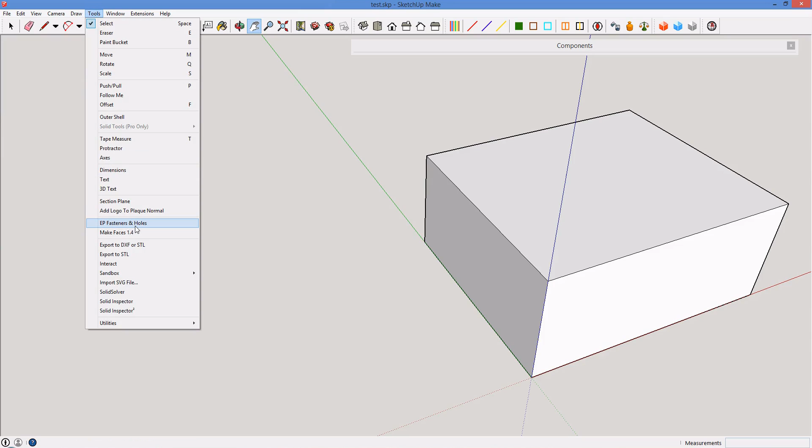Hello, I'm Jay Watson with EyePhysics, and I'm showing our EP Fasteners and Holes tool, which, if you've installed it right, should be on your Tools menu. We needed a tool that would let us drill threaded holes through solid material that we were going to be printing. We have a Formlabs Form 1 printer.

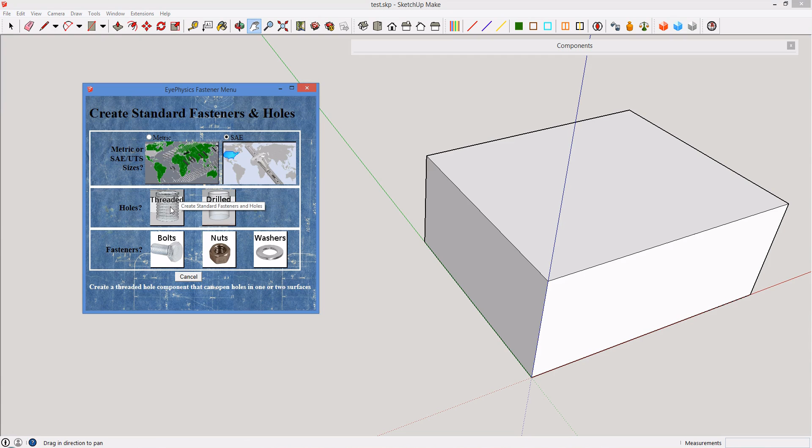So on the tool you can select metric or American standards. You can do drilled holes, threaded holes, bolts, nuts, and washers. We'll start with the threaded because those are the most interesting. Standard sizes, so 3/8 inch, 7/16, 1/2 inch. Coarse, fine and extra fine. If an extra fine is really not available for that size, we use the fine dimension.

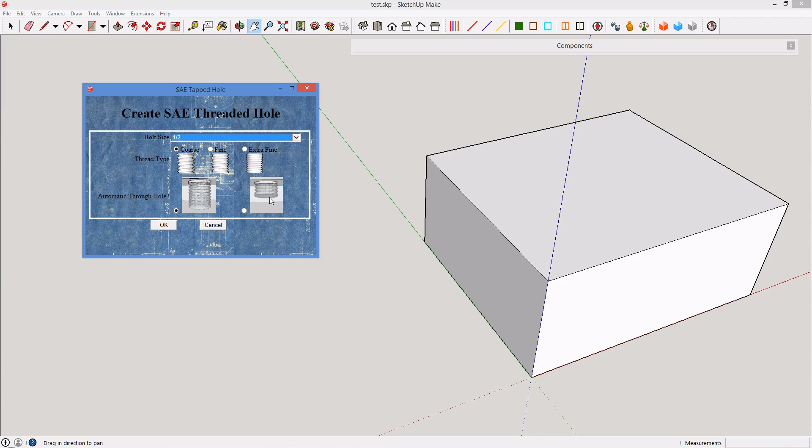And you can have it be a hole of a set distance with a bottom, or a through hole, which will automatically cut and glue itself to both sides. So we'll start with a fixed length, 1 inch. Place it on a surface and it just plugs itself in. See, there's a bottom to it. Threads look well formed.

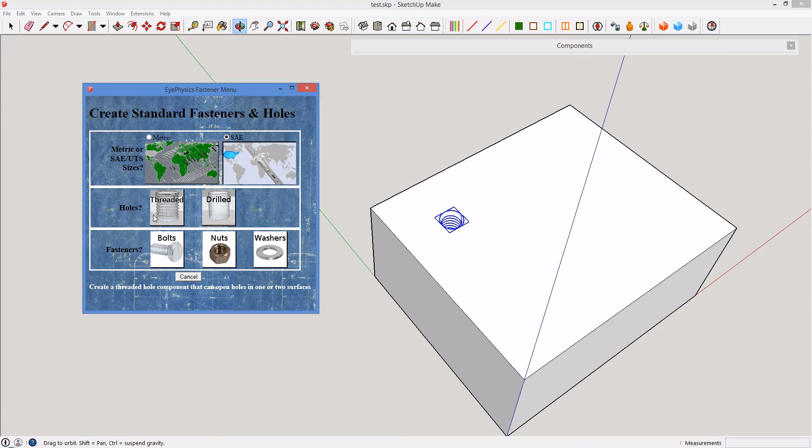If we select a through hole, the length goes away because it's automatically calculated. And now we're creating a 1/2 inch hole, but it doesn't know how long to make it yet, so it's just a hole. So we'll start with putting it on top, and it says that it's going to calculate it to be 2.39 inches.

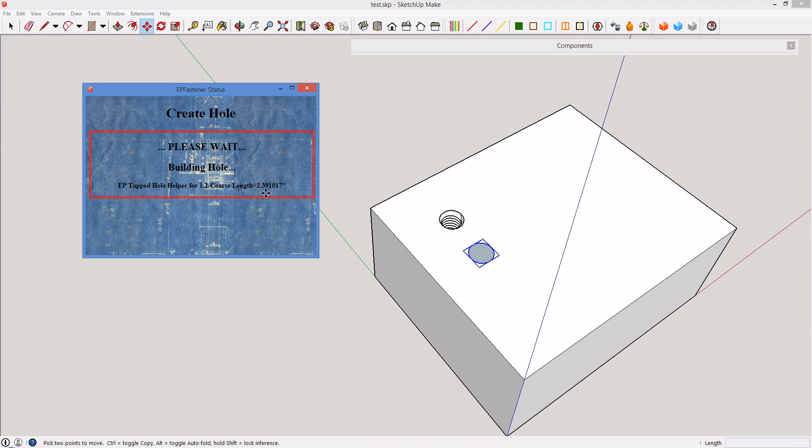And if we look at our components for this model, we find we have a tapped hole of 1/2 inch coarse with a length of 1, that is not a through hole, a tapped hole 1/2 coarse that is 2.39 inches long, that was a through hole, and a helper for the 1/2 inch coarse. And the helper is what's creating the second hole. And you can also just pick that up and make another hole. And since we already have an object that's 2.39 inches long, it just uses it.

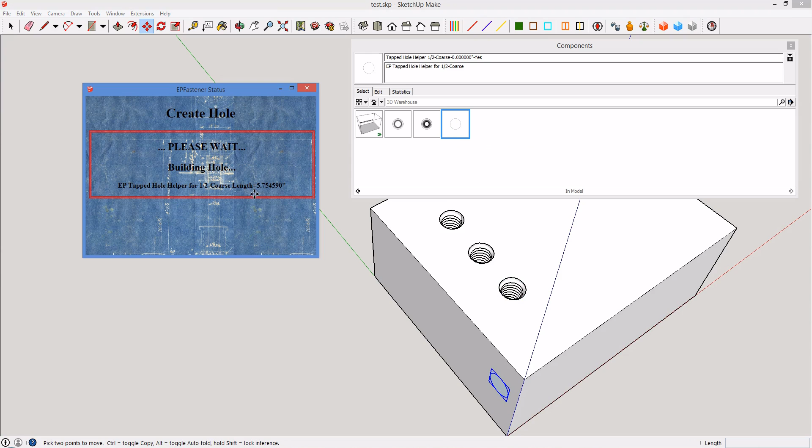If we pick it up and we place it on a different face, now it has to calculate a new distance, and it came up with 5.75 inches through our model. And it's generating the geometry for that. And it'll add a new component of the appropriate length when it finishes.

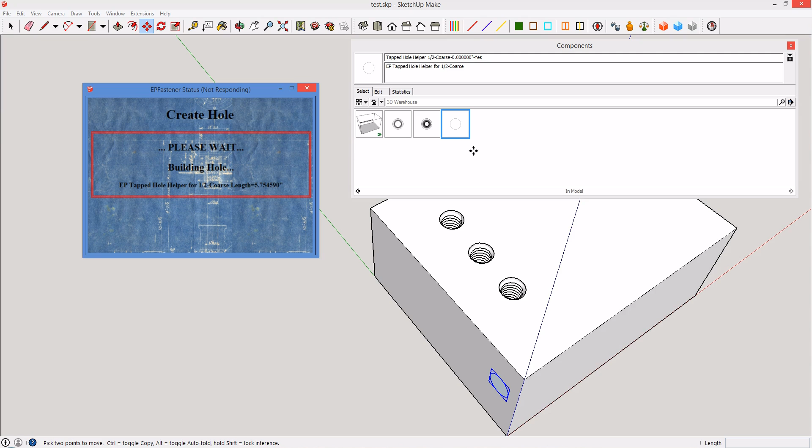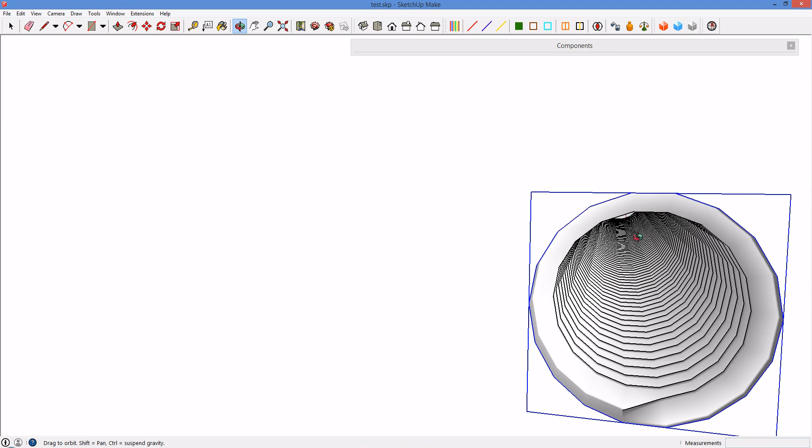So now we have a threaded hole with a length of 5.75. That is also a through hole. So we can look through it and see that it goes all the way through to the other side. Has threads the full length. And once again, if we pick up the helper for this size and drill it through, it's able to reuse the component. So it's much faster, and of course we may have intersected one of those other holes if we weren't careful.

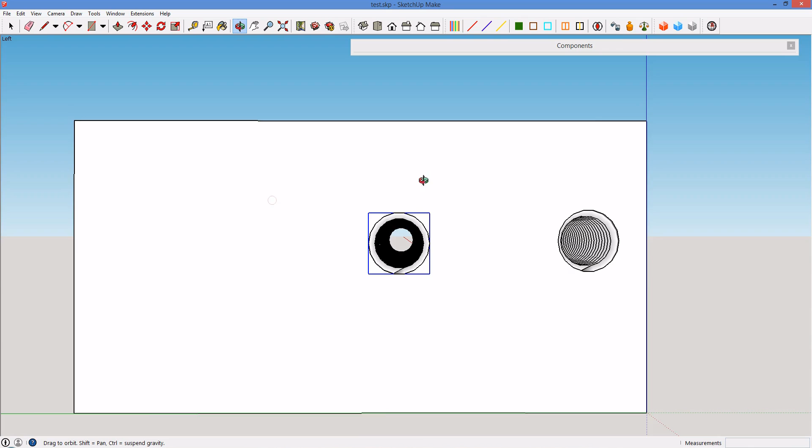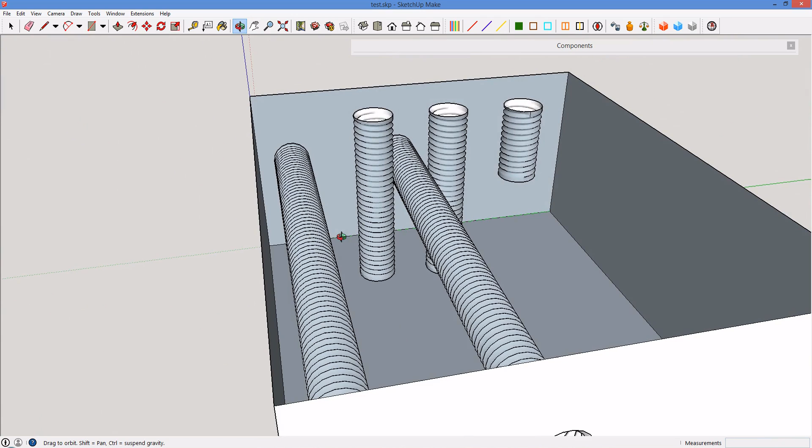And if we hide the wall we were looking through, you can see there's the through length with the outside of the threads, and the one that's short which has a bottom on it. Actually, it has well-formed threads all the way to the bottom, unlike a normal tap, which will leave you with a thread or two at the bottom that are only partially formed.

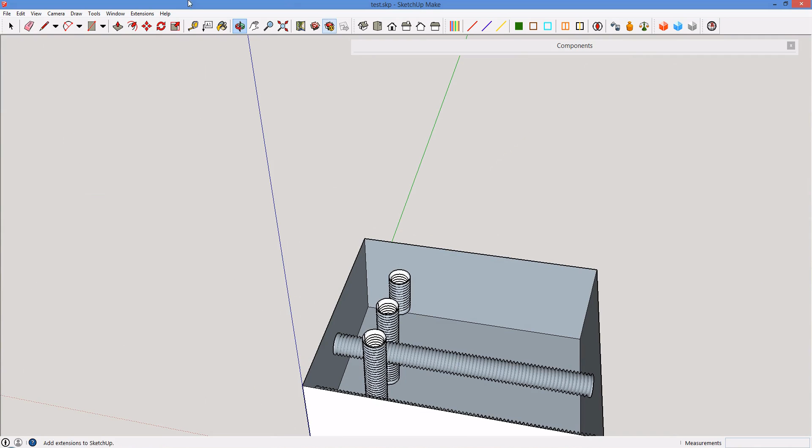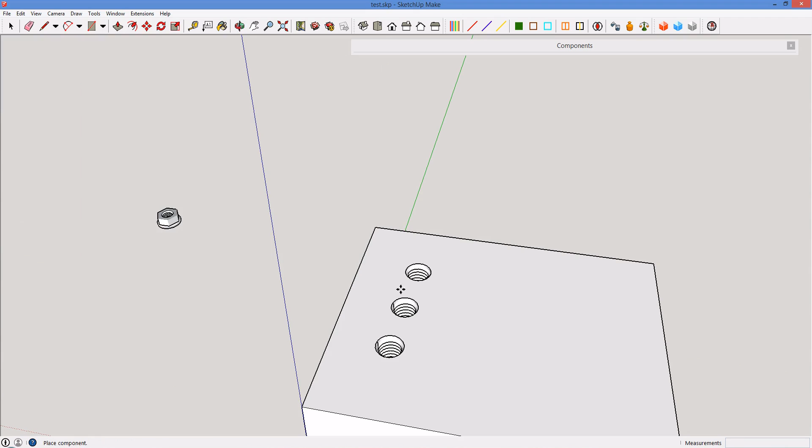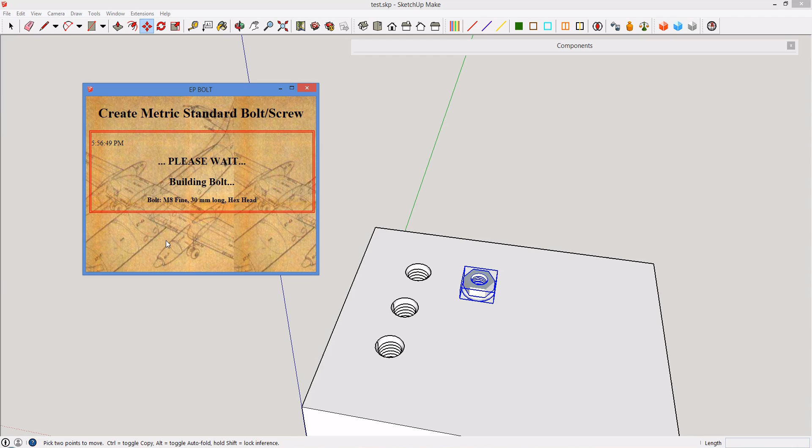So now that we have those, we can go build some bolts, nuts, and washers. We'll switch to metric. So we'll make a fine M8 nut with a washer. And then we'll make an M8 fine, 30 millimeters long with a hex head. There's our bolt. I suppose we could mount it on there.

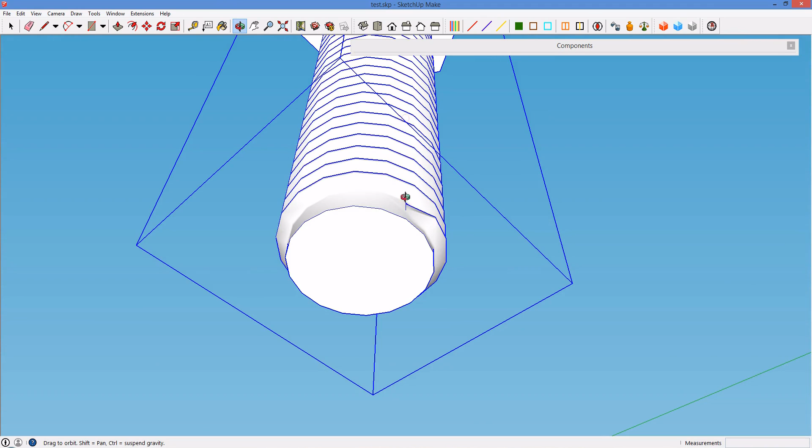You can see it tapers out to the outer dimension as it comes to the head, and the inner dimension as it meets up with the bottom on the last thread. Same time, we also make sockets. Might as well add a washer too. If you're going to place one, you should place both.

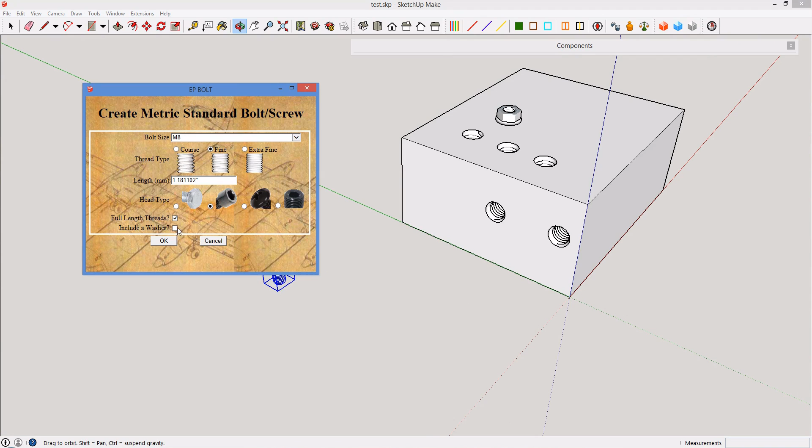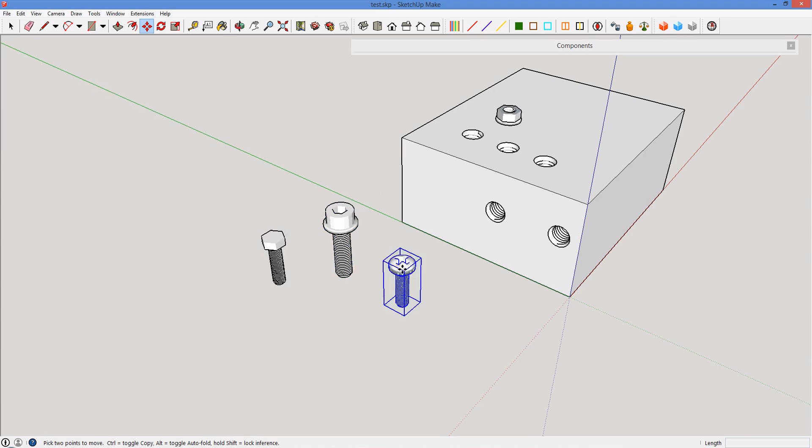Phillips head screws, and it uses the appropriate Phillips screwdriver tip for the size. So up through around 1/2 inch, it's 0, 1, 2, or 3, and then it just stays at the biggest size, even though nobody really makes Phillips heads bigger than that. And you can make set screws. Probably wouldn't make them that long though. Let's make it 15 millimeters, just for amusement.

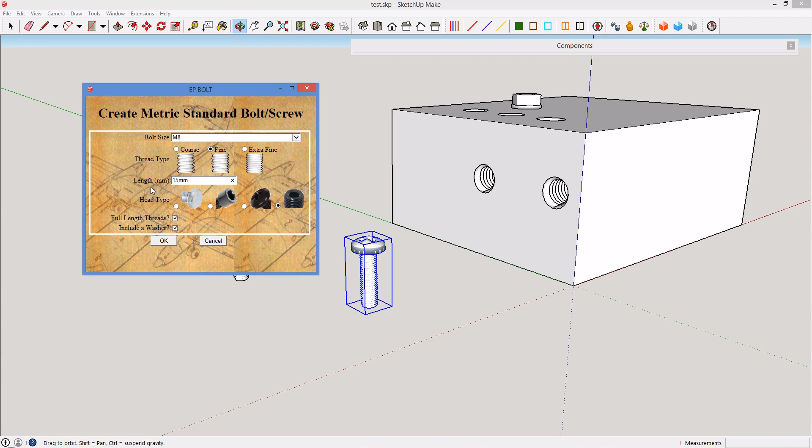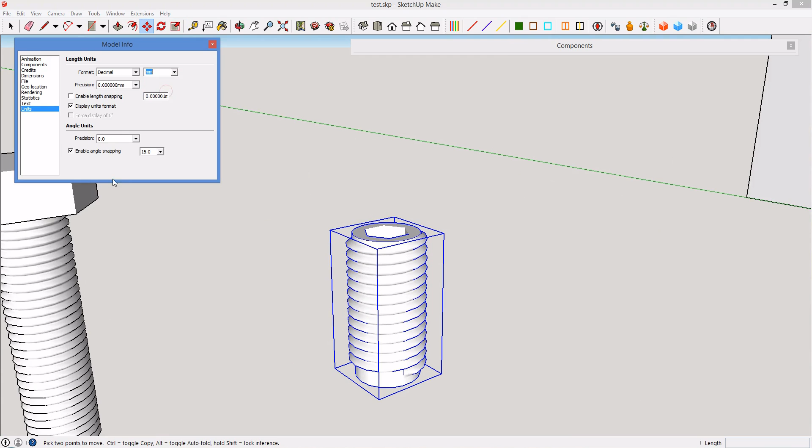I made a model that has inch specifications, so it's converting to inches. Works just as well if you switch from inches to millimeters. And then it just shows it as 15 millimeters. Washers don't apply to set screws, so it doesn't bother. You see we got exactly the same part. But we did end up with two components because they have different specifications in the component list. So each of these came up as a component.

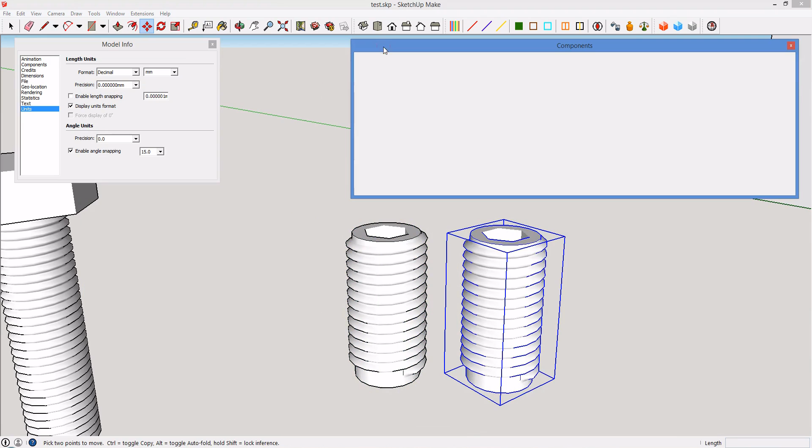Here's our Phillips head, an M8 fine, socket head, set screw, and another set screw. That one's in inches. This one's in millimeters, even though they were the same size. The model information controlled the naming.

So hopefully you'll find this useful.